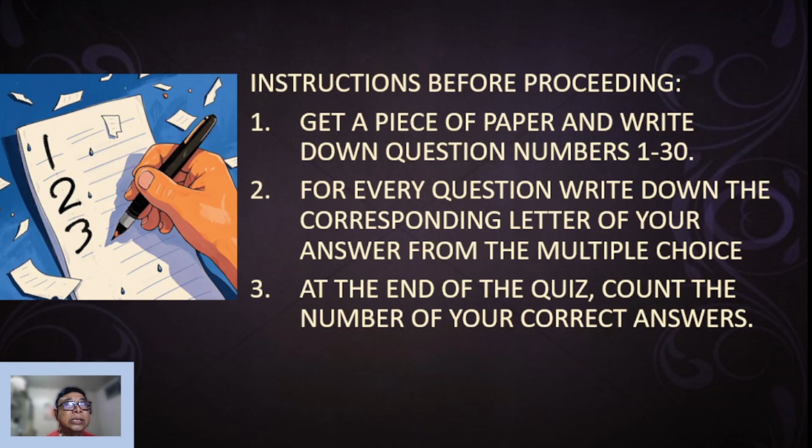So number 1, as per the Philippine Green Building Code, lighting shall switch off after the elevator has been inactive for a maximum period of blank minutes. A. 3, B. 5, C. 10, D. 15.

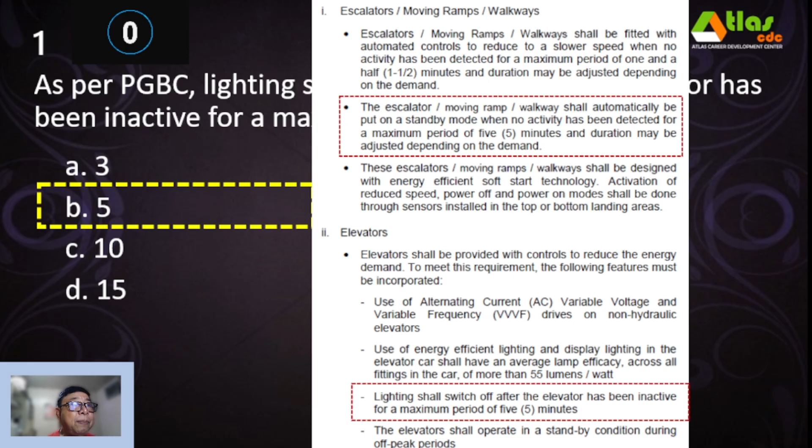And our correct answer is letter B, 5 minutes. So, according to Philippine Green Building Code, for elevators, lighting shall switch off after the elevator has been inactive for a maximum period of 5 minutes. On the other hand, for escalators, moving ramp and walkway shall automatically be put on a standby mode when no activity has been detected for a maximum period of 5 minutes, and duration may be adjusted depending on the demand.

Number 2. Maximum flow rate for a single flush water closet is blank liters per flushing cycle. A. 2, B. 3, C. 4.9, D. 6.

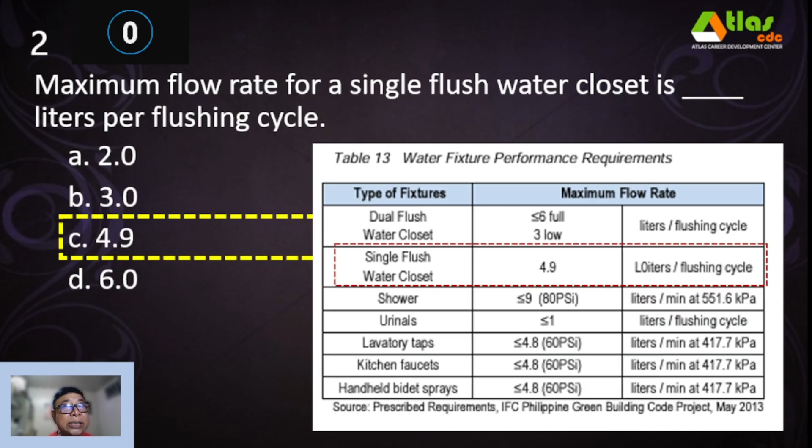And our correct answer is letter C, 4.9. So according to the Philippine Green Building Code, for single flush water closet, a maximum flow rate of 4.9 liters per flushing cycle. So number 3, maximum flow rate for urinals is blank liters per flushing cycle. A. 1, B. 2, C. 3, D. 4.

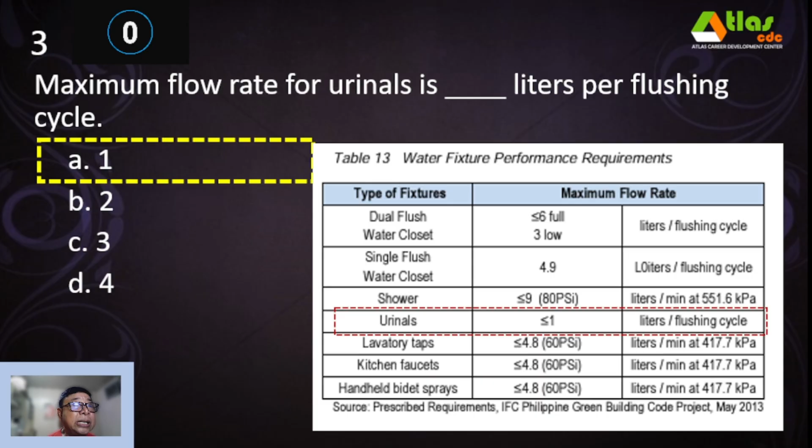And our correct answer is letter A, 1. So for urinals, a maximum flow rate of 1 liter per flushing cycle. Number 4, maximum flow rate for kitchen faucet, lavatory faucet, bidet is blank liters per minute at 417.7 kPa. A. 3, B. 6, C. 4.8, D. 4.9.

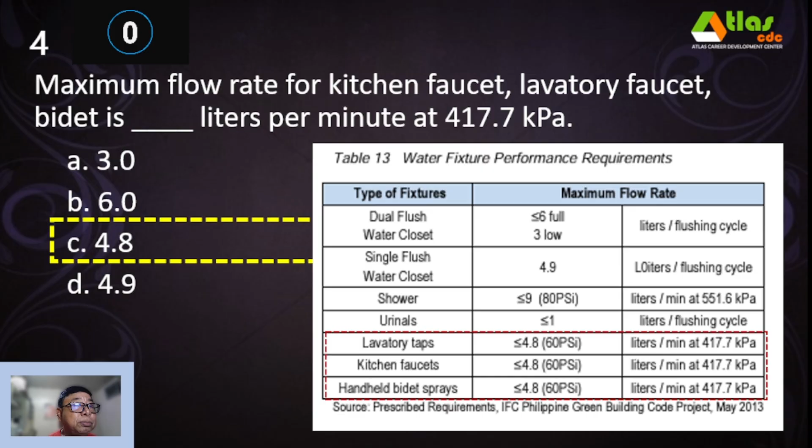And our correct answer is letter C, 4.8. So for lavatory taps, kitchen faucets, handheld bidet sprays, the maximum flow rate is 4.8 liters per minute at 417.7 kPa. Number 5, which is not a brand of wire? A. Emerald, B. Philflex, C. Duraflex, D. Phelps Dodge.

And our correct answer is A, Emerald. So electrical wires and cables are from brands like Columbia, Duraflex, Metro, Philflex, and Phelps Dodge. On the other hand, in the Philippines, Emerald is known for supplying a variety of construction materials, including PVC pipes and fittings, PVC flush doors, and eco water systems. They are also the official distributor for Graf rainwater harvesting systems.

Number 6, cheapest circuit breaker. A. GE, B. Square D, C. Koten, and D. Siemens. And our correct answer is letter C, Koten. So example is for a 30 amps plug-in circuit breaker. Koten is around 360 to 370 pesos, while GE is 975 and Siemens is more than 3,000, while Square D is more than 4,000. So the most expensive is Square D.

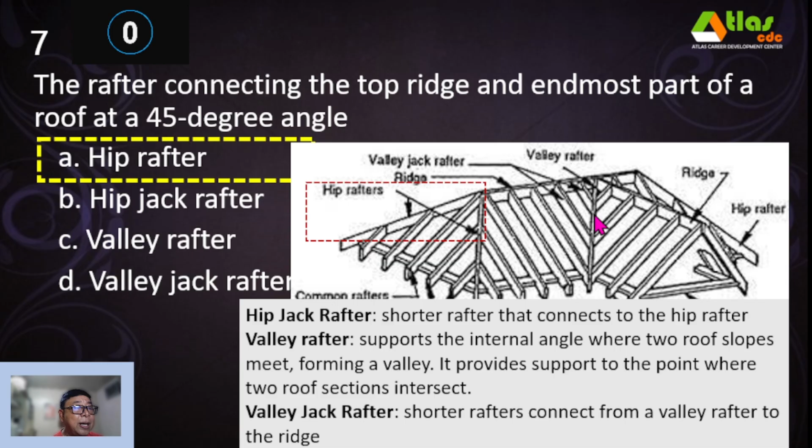Number 8, minimum depth of a shallow foundation. A. 600 mm, B. 1000 mm, C. 1200 mm, and D. 1500 mm.

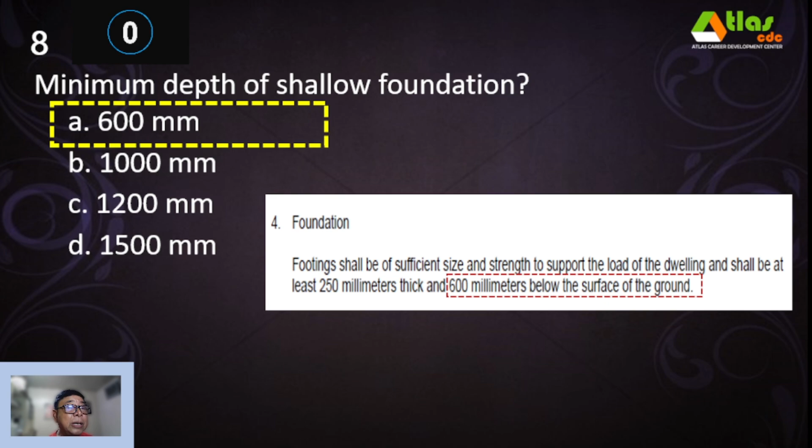And our correct answer is letter A, 600 mm. So footings, according to the NBCP, shall be of sufficient size and strength to support the load of the dwelling. This is for Group A dwellings, and shall be at least 250 millimeters thick and 600 millimeters below the surface of the ground. So from the top of the footing to the grade level is 600 mm minimum.

Number 9, best sprinkler for high hazard structures like airplane hangar. A. Deluge. B. Pre-action. C. Foam. D. Dry pipe.

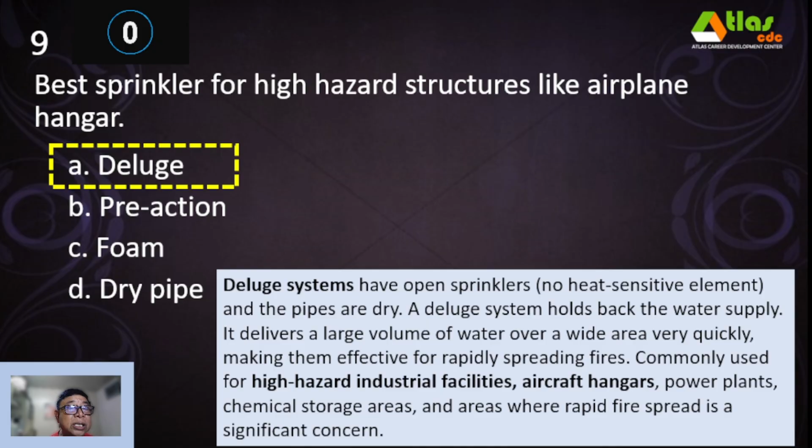And our correct answer is A, Deluge. Deluge systems have open sprinklers wherein there is no heat-sensitive element and the pipes are dry. A deluge system holds back the water supply. It delivers a large volume of water over a wide area very quickly, making them effective for rapidly spreading fires.

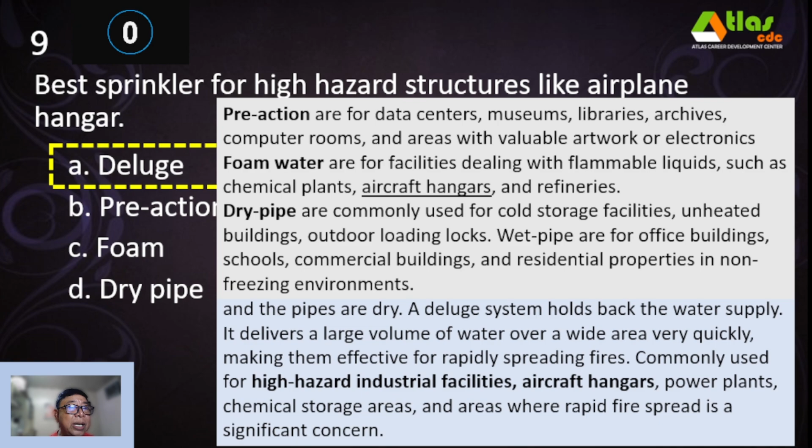Commonly used for high-hazard industrial facilities, aircraft hangars, power plants, chemical storage areas, and areas where rapid fire spread is a significant concern. On the other hand, pre-action systems are for data centers, museums, libraries, archives, computer rooms, and areas with valuable artwork or electronics. Foam water systems are for facilities dealing with flammable liquids such as chemical plants, aircraft hangars also, and refineries. Dry pipe systems are commonly used for cold storage facilities, unheated buildings, outdoor loading docks, and wet pipe systems are for office buildings, schools, commercial buildings, and residential properties in non-freezing environments.

Number 10. Identify shear stud connector in a composite slab. A. 1, B. 2, C. 3, D. 4.

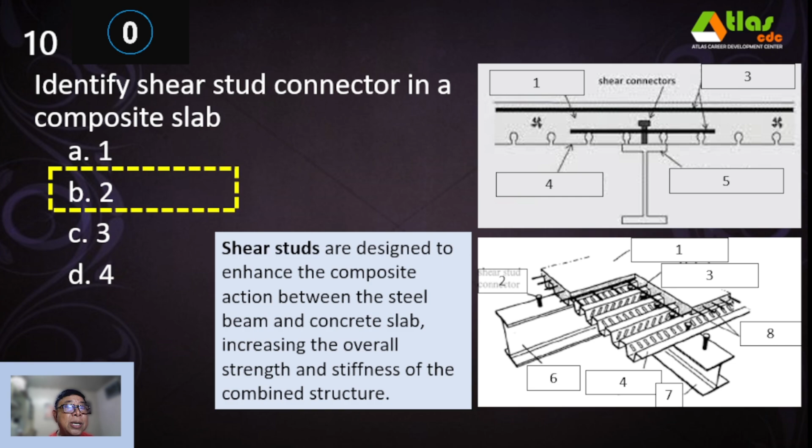And our correct answer is letter B, number 2. So shear studs are designed to enhance the composite action between the steel beam and concrete slab, increasing the overall strength and stiffness of the combined structures.

Number 11. Identify the top flange in a composite slab. A. 3, B. 5, C. 7, and D. 8.

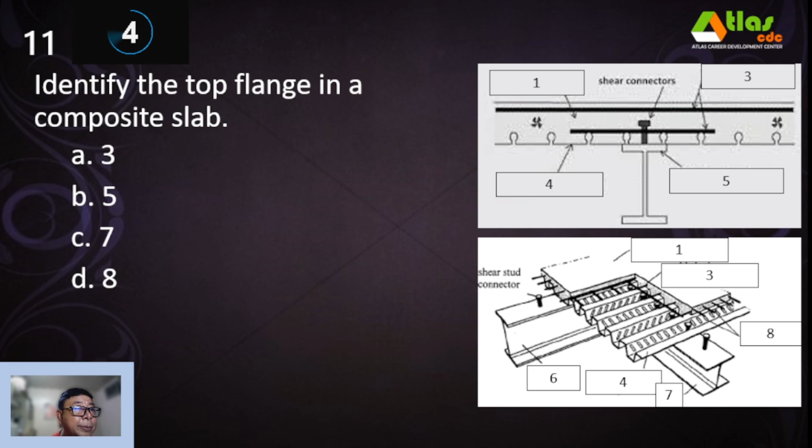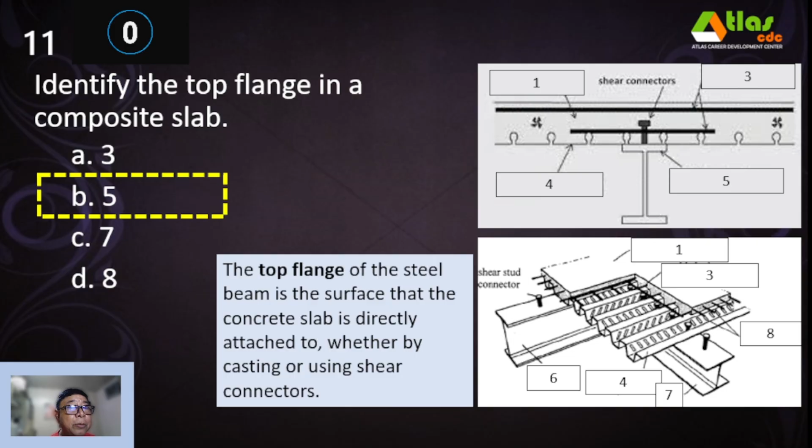And our correct answer is letter B, number 5. So this is the top flange of the steel beam, and that is the surface that the concrete slab is directly attached to, whether by casting or using shear connectors.

Number 12, identify the steel reinforcements in a composite slab. A 3, B 4, C 6, and D 8.

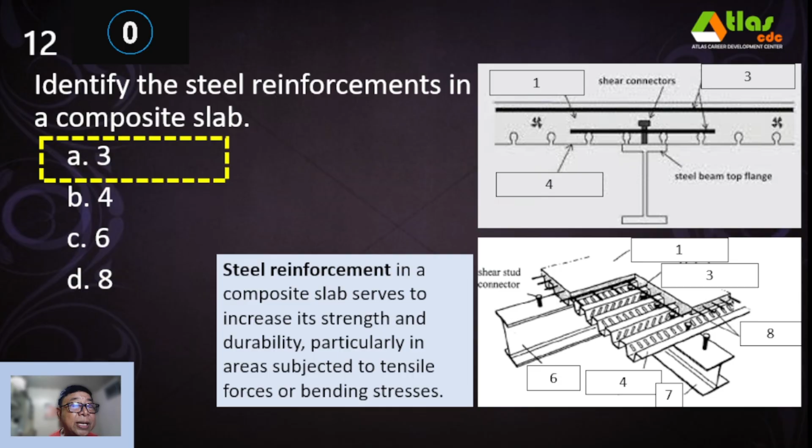And our correct answer is letter A, number 3. So steel reinforcement in a composite slab serves to increase strength and durability, particularly in areas subjected to tensile forces or bending stresses. So this one.

Number 13. Identify the metal decking in a composite slab. A 4, B 6, C 7, and D 8.

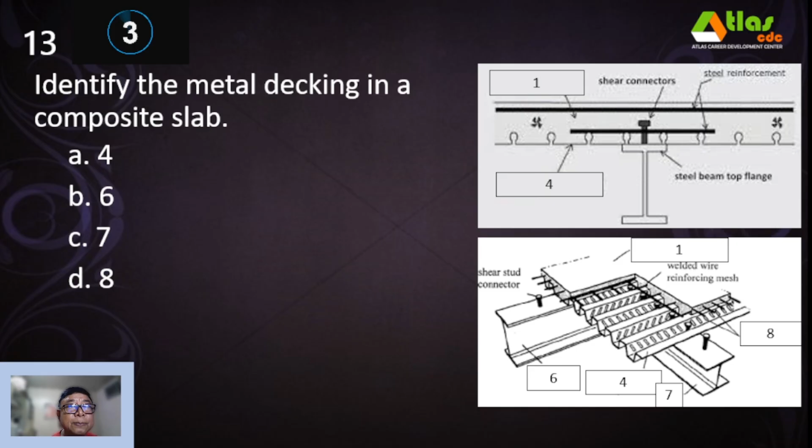And our correct answer is letter A, number 4. So in a composite slab, the purpose of metal decking is to create a bond with the concrete, forming a strong and lightweight floor system. The decking acts as a permanent form for the concrete pour and also provides reinforcement by interlocking with the concrete as it cures. So this is our metal decking.

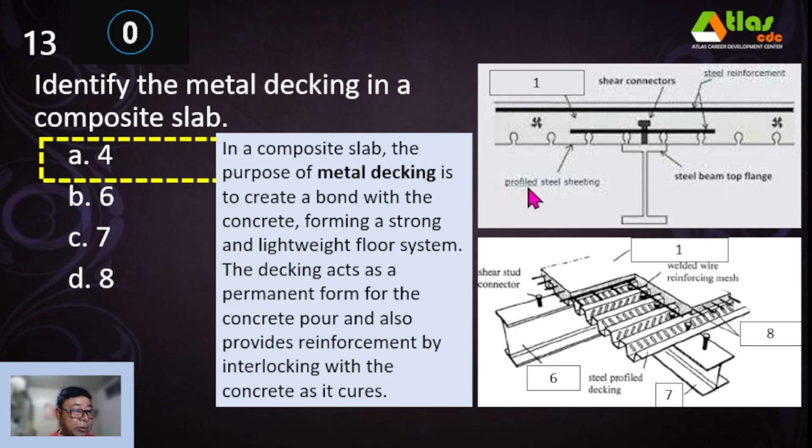This is number 4. Number 14. Identify the slab in a composite slab. A 1, B 6, C 7, and D 8.

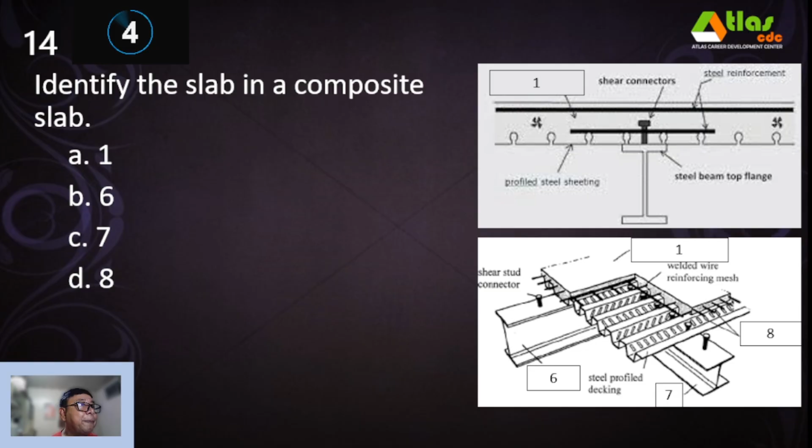And our correct answer is letter A, number 1. Composite slabs comprise reinforced concrete cast on top of profiled steel decking, which acts as formwork during construction and external reinforcement at the final stage.

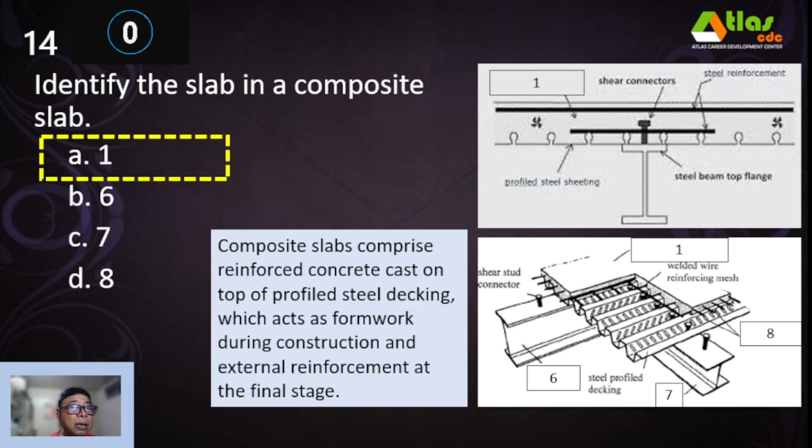Number 15. Conduit that can be used for high temperature. A. EMT, B. Aluminum, C. IMC, D. PVC.

And our correct answer is letter A, EMT. While other options like aluminum and IMC can also withstand some heat, EMT is specifically suitable for high temperature applications.

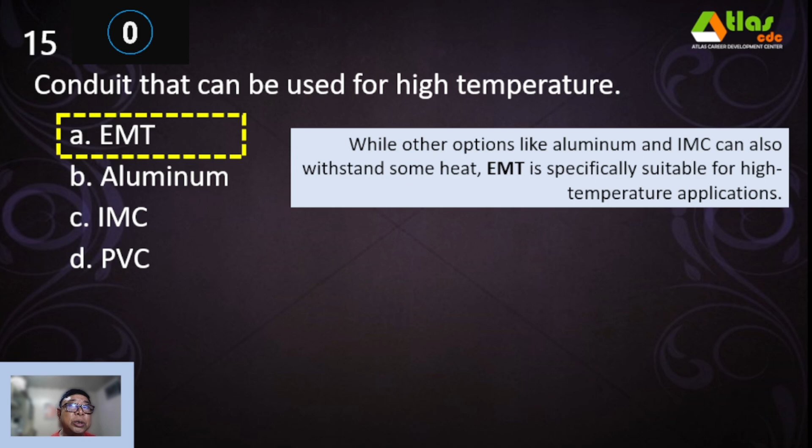Number 16, which is referred to as the Philippine mahogany. A. Tangili, B. Acacia, C. Yakal, D. Guijo.

And our correct answer is letter A, Tangili. A moderately hard reddish wood, Tangili is one of the 7 local woods often referred to as Philippine mahogany. This abundant wood type boasts a fine ribbon or straight grain. It's relatively soft and easy to work on, but resilient enough for outdoor construction. Tangili is ideal for interior finishes, cabinets, and boat building. So these are the 7 Philippine mahogany group: red lauan, almon, tangile, bagtikan, tiaong, mayapis, and white lauan.

Number 17, insulation that has no 50 years warranty. A. Rock wool, B. Glass wool, C. Earth wool, and D. Polyethylene.

Our correct answer is letter D, polyethylene. Polyethylene, like foam insulation such as XPS or spray foam, has warranties that can vary. Some brands of polyethylene-based rigid foam or spray foam offer 15-year or even limited lifetime warranties. But the standard 50-year warranty is less common across all polyethylene insulation types compared to wool-based products.

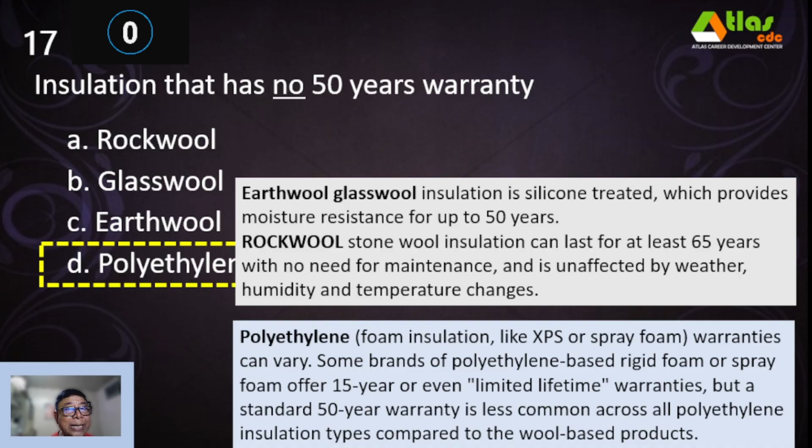Number 18. Characteristic of steel that is not good for seismic locations. A. Hardness. B. Density. C. High ductility. D. Low in heat.

Our correct answer is letter A, hardness. Hardness in steel often correlates with brittleness. In an earthquake, a brittle material is more likely to fracture suddenly and catastrophically under cyclic and dynamic loads. This is a major concern for structural integrity during seismic events.

Number 19. The test made to identify soil-bearing capacity. A. Permeability. B. Slump test. C. Compaction. D. Penetration test.

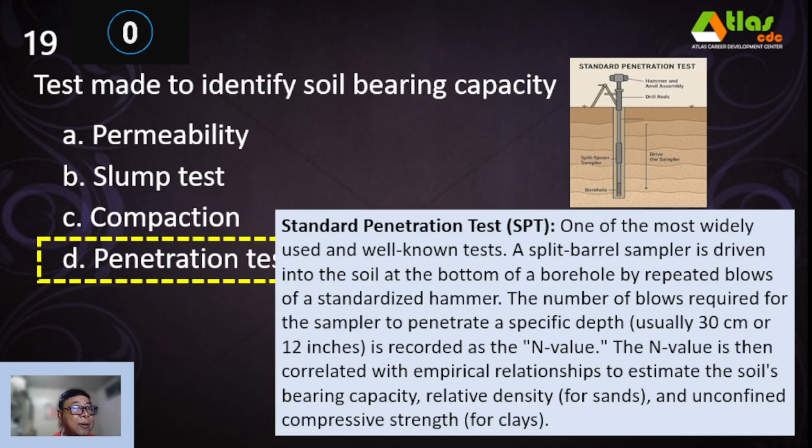Our correct answer is letter D, penetration test. Standard penetration test, or SPT, is one of the most widely used and well-known tests. A split barrel sampler is driven into the soil at the bottom of a borehole by repeated blows of a standard hammer. The number of blows required for the sampler to penetrate a specific depth, usually 30 cm or 12 inches, is recorded as the N value. The N value is then correlated with empirical relationships to estimate the soil's bearing capacity, relative density for sand, and unconfined compressive strength for clays.

Number 20. Insulation material made from recycled materials combined through heat and does not use chemical adhesive. A. Cellulose. B. Polyethylene. C. Polyester. D. Rock wool.

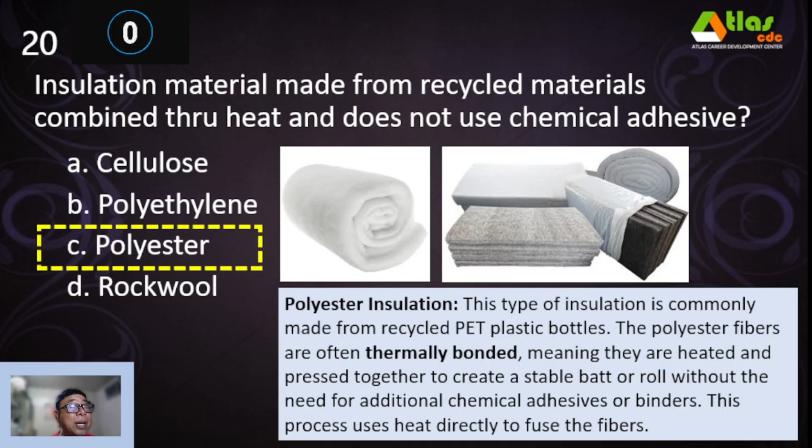Our correct answer is letter C, polyester. Polyester insulation is a type of insulation commonly made from recycled PET plastic bottles. The polyester fibers are often thermally bonded, meaning they are heated and pressed together to create a stable batt or roll without the need for additional chemical adhesives or binders. This process uses heat directly to fuse the fibers.

Number 21. Protects circuit connections and deters tampering. A. Utility box. B. Junction box. C. Panel box. D. Light box.

Our correct answer is letter C, panel box. Panel box, also called a breaker box or service panel, is the best option for protecting multiple circuit connections and providing a degree of tamper resistance. Panel boxes house circuit breakers or fuses and are typically enclosed with a cover that can be secured. While not impenetrable, they offer a significant barrier against casual tampering and protect the connections from physical damage.

Number 22. Type of paint that uses oil as a vehicle, emits odor, and takes long to dry. A. Oil-based. B. Enamel. C. Emulsion. D. Alkyd.

Our correct answer is letter A, oil-based. Oil-based paint uses natural oils like linseed oil or synthetic resins like alkyds as the binder and solvent. They are known for their strong odor, durability, and long drying times. Alkyd paints are a type of oil-based paint where the binder is a synthetic alkyd resin. So while alkyd paints fit the description, oil-based is the broader category that directly answers the 'uses oil as a vehicle' part.

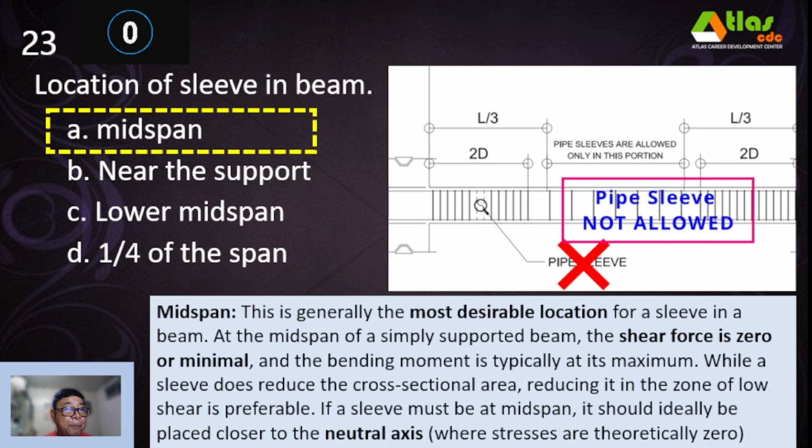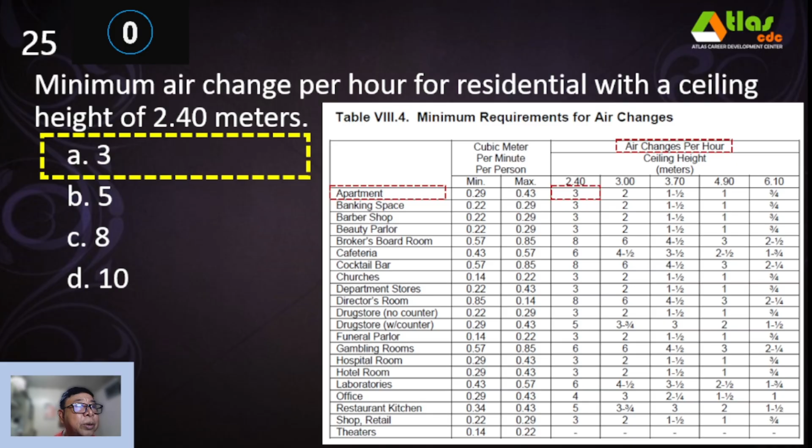Our correct answer is letter A, 3 air changes. This is as per NBCP for apartment or residential with a ceiling height of 2.4 meters. Air changes per hour shall be 3.

Number 27, maximum slenderness ratio of column. A, 120. B, 150. C, 180. D, 200.

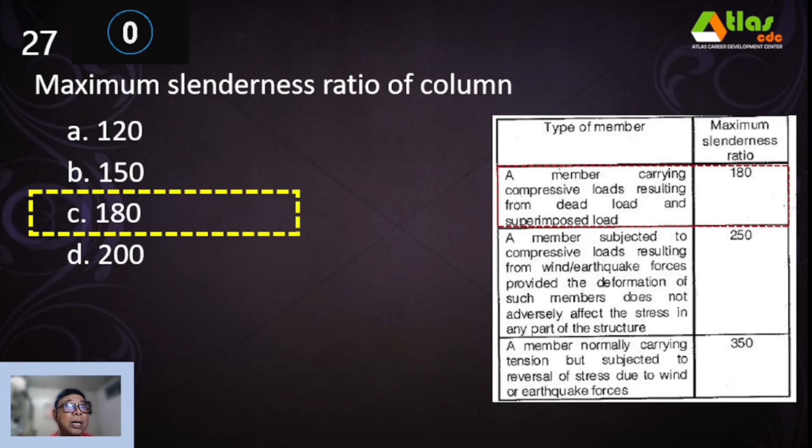Our correct answer is letter C, 180. For a member carrying compressive loads resulting from dead load and superimposed load, like a column, the maximum slenderness ratio is 180. Number 28, thickness of glass used for wood door.